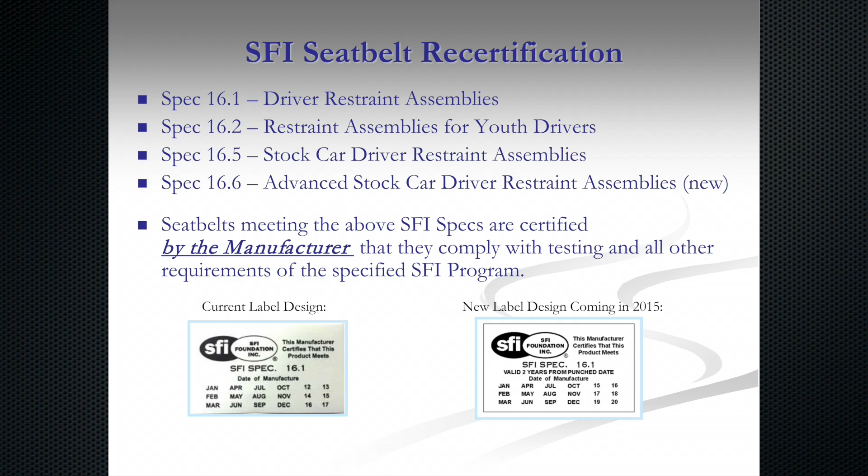Just yesterday we held our biannual committee meeting of the Driver Restraint System Committee to review these series of 4 specs, and starting in 2016, we will have yet another new label that will go on those systems that we think will eliminate a lot of misconception and a lot of confusion. The new label will simply say, this system is valid until, and it will have the date printed right on the label. The manufacturer will attach that label when he manufactures the product, and when it goes out into the field, no matter where it goes or how it's used, on the date that it says on the label, it will require recertification.

And we think that will not only help tech inspectors, but it will help consumers understand; we don't have to figure out, well, what was the date of manufacture, and when is it good to the end of that year or what month. And the bottom line is, the label is going to say exactly when it requires recertification. And we thought that might be a bit of a hard sell to the manufacturers yesterday, and it wasn't. And we were absolutely shocked and surprised that they were unanimously in favor of going to that system to eliminate any confusion and eliminate any possibility of somebody mutilating a label or something that would make it difficult to determine in the tech line exactly when that system needs to be recertified. Sure.

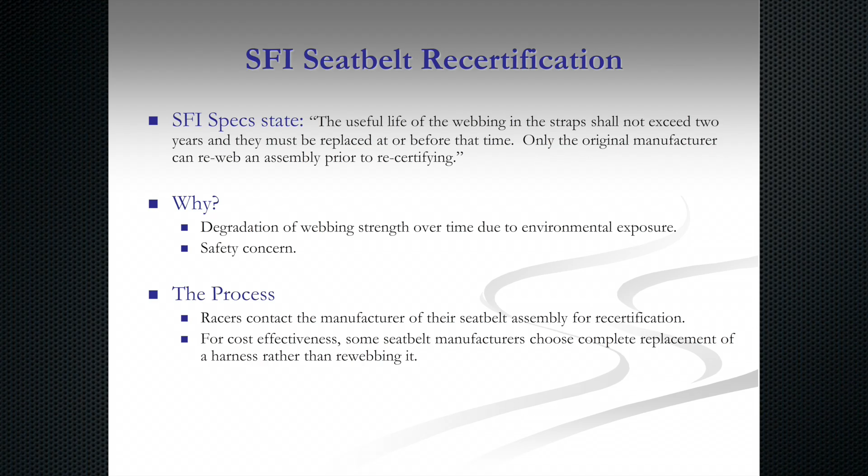And that's up to the manufacturer. Roughly half of the manufacturers are happy to re-web your belts. The other half will take your old belts in exchange, give you a discount on a new set. It costs about $69 to buy a brand new set of 16.1 certified assemblies. It costs about $55 to have it re-webbed and recertified. If you do the math, you can see that buying a new set a lot of times is just a heck of a lot more cost effective because you eliminate shipping costs.

And even though we know the hardware is going to be serviceable for a significant period of time, the webbing isn't. So a lot of racers that maybe have their manufacturer in the same town, they can run it by, pick it up a couple of days later after it's been re-webbed. That might make a lot of sense. But if you don't have that, you got to ship parts around, you're probably better off just to go out and buy a new set or ship your old set back. And most of the manufacturers will give you a significant discount on an exchange of an old set of restraints for a new set of restraints.

Seatbelt certification. What is the 2-year cycle based on? These are two charts that show very clearly the deterioration level of nylon and polyester webbing over a period of time. The first two charts that we have up here are the DuPont light and weather testing, which was in April of 1966, and that was the first time that we know that anybody actually tested the degradation of material over a period of time, and it was done by the actual manufacturer.

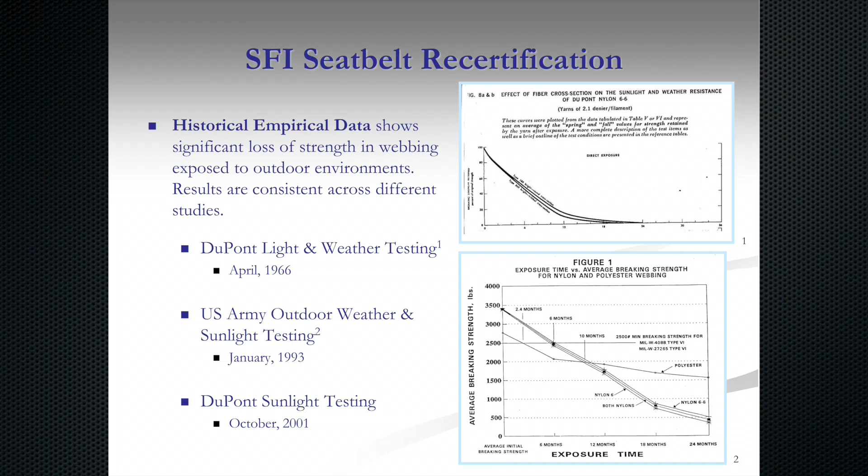DuPont at that time was pretty much the sole manufacturer of nylon webbing used in these systems, and most of their experience came with military applications, and it was actually the military that asked them to provide some empirical data, and this is what they provided them with. By 1993, the U.S. Army decided to do some outdoor weather and sunlight testing of its own to verify the DuPont research, and found that the deterioration factor was actually more significant than it was even in the DuPont testing. And as you can see, literally from the time that the product is produced, it's starting to lose its effectiveness, and it loses more of it over time, especially if it's exposed to UV rays and or moisture or both.

How do we test for UV exposure? My boss at SFI, Arnie Kuhns, licensed engineer, MBA, pretty smart guy, didn't know how he could best measure the deterioration of webbing due to exposure to the elements. So being a scientist himself, he figured out that by stringing up some nylon webbing on the roof of the SFI test lab in Escondido, California, and leaving it there for a year or two, he could probably do some pull tests then and determine exactly what it was.

The only problem with that was any new material that came in for review and testing had to sit on the roof for a minimum of a year, or more like 2 years, before there could be any realistic determination of what the deterioration factor was.

Ultimately, a company came up with a marvelous machine that speeds up the process of exposure scientifically and measurably in a computerized situation, where we can put some material into this exposure testing machine and set all the dials and buttons and switches to whatever criteria we feel is appropriate, and it will impose those forces on that material in a very compressed period of time, and then we can do the extrapolation of the exposure levels versus the pull test that we do on the material afterwards.

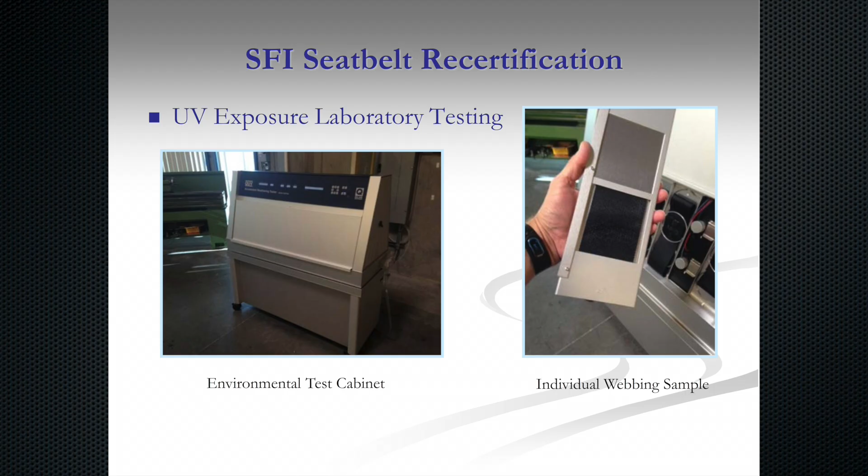And you can not only feel the difference in the material that's been exposed in this machine, you can actually see it. And not every form of nylon is going to discolor the way that particular one did. Some are more, some are less, and it depends on the quality of the dye and the material. But the material changes due to exposure.

Now, this machine exposes not only to UV rays, but also to moisture, and it does both at the same time. So it's producing that worst case scenario that I was talking about before, and it does it in a very scientific and measurable fashion. Seatbelt recertification based on scientific data.

Now, some of the numbers that you see here aren't going to make a lot of sense because of the way the tests are conducted, but essentially the spec requires that the entire system sustain 6,300 pounds of force on the body block in order to pass the test. That means that each piece of that material, including the 2-inch anti-submarine strap, has to collectively withstand 6,300 pounds of pressure. You can see very quickly that new nylon, which we call the control nylon, 10,000 pounds of pressure, well above the minimum. Poly, right in the same range.

Once the material has been subjected to the UV rays and the moisture and the retest is done, those numbers drop significantly to where nylon, on the average, falls below the 6,300 pound minimum level. The whole idea of 16.1 is to make sure that the restraint that's purchased new meets or exceeds the spec, but that it also meets that requirement at the end of its useful life, or the 2 years.

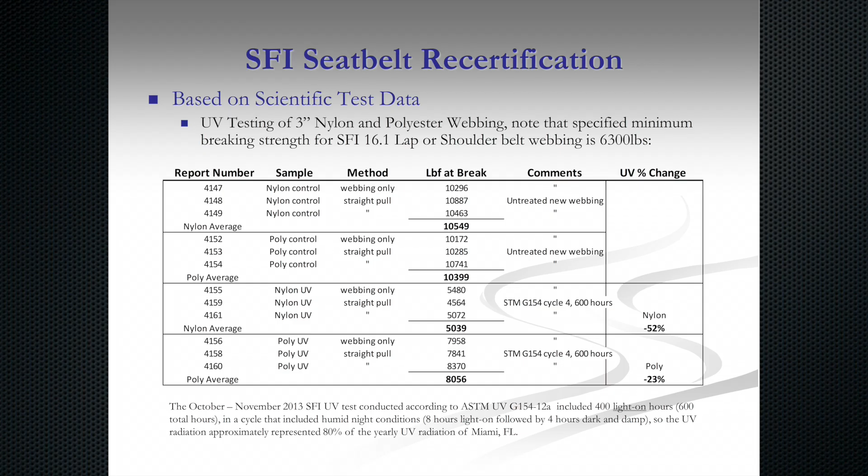And you can see that it's very close in the case of nylon to not even coming up to that standard. Again, this is worst case scenario exposure, so under average conditions, after 2 years, all 16.1 systems will meet that 6,300 pound requirement.

The next one is simply the difference between 3-inch webbing and 2-inch webbing. And a lot of systems now that you're seeing in the tech lines are what we call hybrids. Some sanctioning bodies, and I think maybe the NHRA, still require minimum 3-inch webbing. The spec doesn't care, really. There is no requirement in the SFI 16.1 or the 16 series specs for 3-inch or any other width. It's strictly the strength requirement.

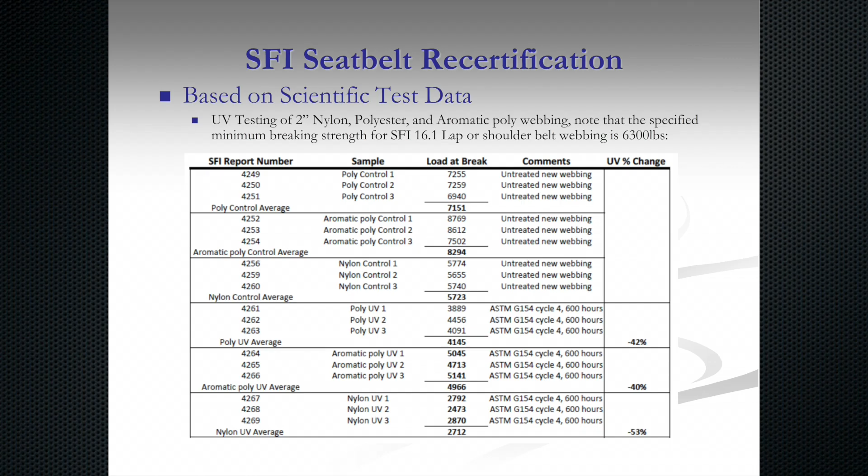And with some of the improved materials, we find that the 2-inch belts meet or exceed the same pull requirements as 3-inch material, simply because it's heavier, it's thicker, and it meets. And biomechanically, a 2-inch system in many cases is actually more effective on the human body than a 3-inch system.

Another thing that came into play was the hybrid system, which is where you have a head and neck restraint, and the restraint is not designed to accommodate a 3-inch shoulder strap, but it is designed to accept a 2-inch strap. And you'll see systems come through tech now where the shoulder harnesses are 2-inch, or at least in the area where they pass over the head and neck restraint device, but the lap belt will still be a 3-inch belt, and maybe even the lower part of the shoulder harness will as well.

But we do have systems that are entirely 2-inch, lap, shoulder harness, anti-submarine, that readily pass 16.1, and many sanctioning organizations accept them readily. And biomechanical engineers like Dr. John Melvin will tell you that the body actually likes a 2-inch system in some cases, or in a lot of cases, better than a 3-inch system.

It used to be you saw all of the same stuff come through the tech line. It was all 3-inch, it was all 16.1. It's not that way anymore, and it's important for you to understand that what you're looking at is going to be a different kind of system than you may have seen over the past few years.

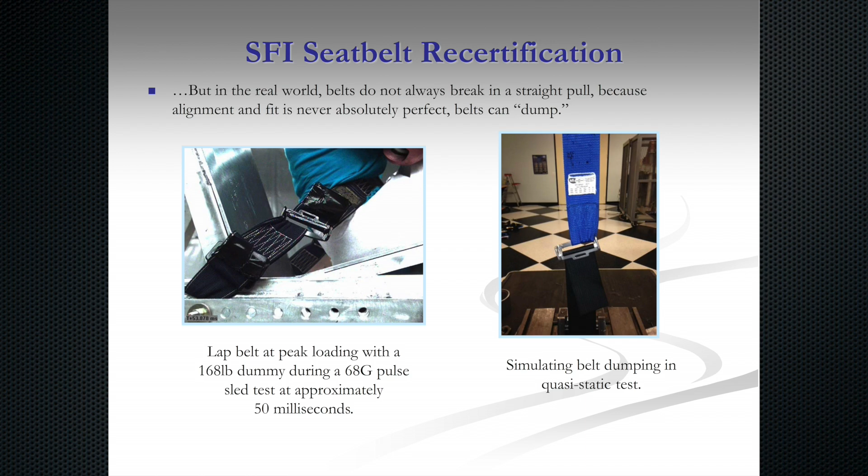But you also need to look at the installation, and if you see a lot of misalignment between parts of the system, you might want to suggest to the racer that they get together with the manufacturer or the chassis builder or whoever and take a look at the way things are done, and make sure that when there's an impact, whether it be frontal, top, side, or whatever, that all of those sections of the system remain as well aligned as possible. So those are some things that you want to look for. And again, we have the numbers that show what kind of deterioration in performance that we get in the dumping situation.

Now, the testing we do for certification to the 16 series specs is done on what we call a body block. It's a wooden block that mimics the human form, and the restraint system is draped over the body block, attached to hydraulic rams that are calculated to apply a certain amount of pressure to the entire system at one time. And it pulls on all 5 or 6 or 7 of the elements of the system at the same time, pulls it to the required 6,300 pounds and stops. We do not test these systems to destruction.

So people ask me all the time because they know I'm involved with SFI, well, what's the best one? I want the best one, the strongest one that money will buy. We don't know. We really don't know because we only test to the spec. We don't test to destruction. We want to just make sure that the system that's labeled and certified meets the minimum standard, because we know over years and years of experience in all kinds of racing applications that the standards required by the spec are capable of keeping the driver in the car where he belongs. And that's all we're trying to accomplish.

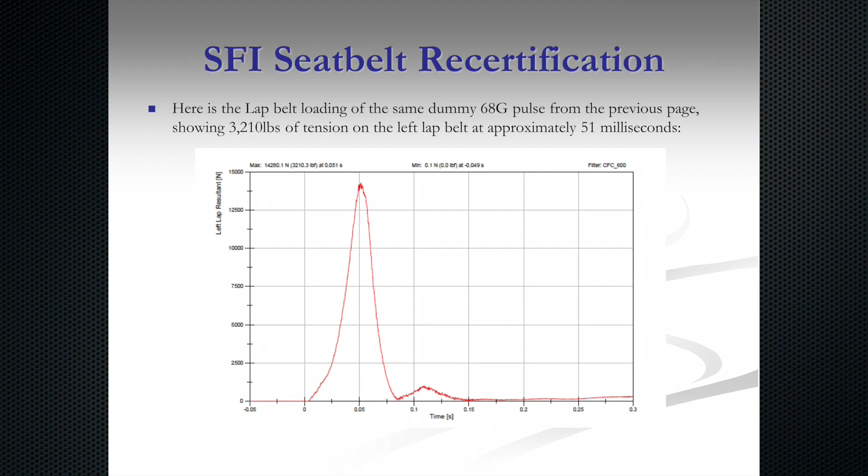And when you see numbers like 14,000, you think, oh my God, that's way above the test spec. Well, those are newtons, which is an engineering term. That's really 3,200 pounds of pressure that's exerted on that driver restraint system in that frontal impact. And it absolutely correlates directly to the numbers that we see on the body block. So it helps us to verify that the numbers that we're dealing with are correct and verifiable.

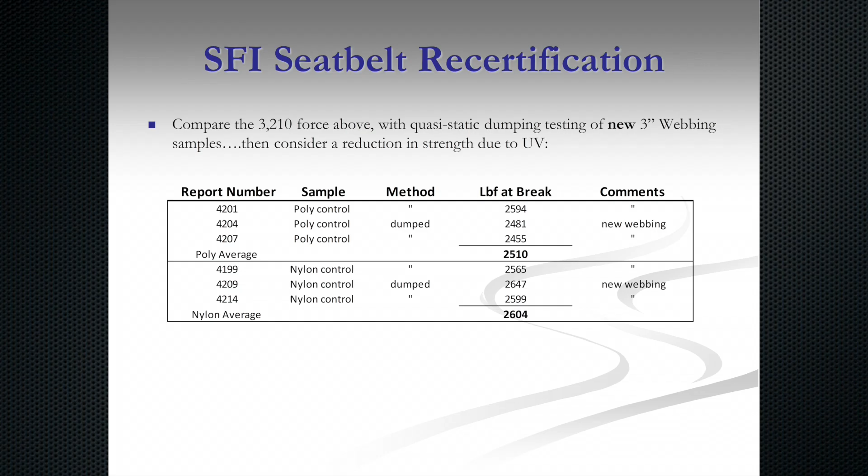The next recertification slide here talks about 3,200 pounds of force, which is similar to what we had on the sled test, and it shows the deterioration of performance when dumping occurs. And this relates right back to the installation issue that I talked about before. If the system is not installed correctly and you experience dumping, those numbers drop down into the 2,500 pound range, 2,600 pound range, which is only about a third of the required strength of the system according to the spec. So it just re-emphasizes the importance of proper installation.

Seatbelt recertification, other considerations. Certifications are not valid beyond the expiration date set by the standard. Allowing use past expiration is a liability risk. Let me talk real quickly about liability risks. I spent 9 years at the NHRA as Vice President of Safety, Insurance, and Legal.

The least number of lawsuits that NHRA defended during those 9 years that I held that position, the least number was 21. NHRA is a huge litigation target because of what we do. Now, not all of those were drivers involved in crashes. They were drunks falling out of the grandstands, people tripping in the parking lot. I mean, there were, but suffice to say that we live in a very litigious society.

SFI has developed 2 programs that are designed to protect the sanctioning body and the individual tech inspectors from liability exposure. One of them is the minimum standards. If you make sure that all of the products on the car that are required to meet minimum standards as required by the rule book, as an inspector, you are virtually liability free. The sanctioning body is also liability free.

But in the worst case scenario, somebody crashes. There's a post-incident investigation done. The family hires an attorney. The attorney hires an expert to do his own examination. First thing he determines, well, the driver restraint system was out of the certification cycle. It was illegal for use. That constitutes improper inspection, which results in something called strict liability.

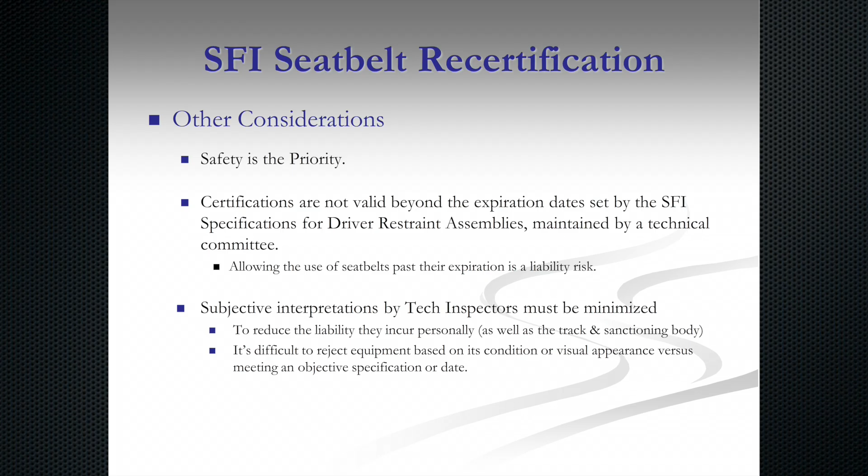Subjective interpretations by tech inspectors must be minimized to reduce the liability they incur personally as well as track and sanctioning body. It's difficult to reject equipment based on its condition or visual appearance versus meeting an objective specification or date. That means that no tech inspector should be charged with the responsibility of simply looking at a driver restraint system and saying, yeah, it looks pretty good to me. Make sure it's in the recertification cycle.

What it doesn't mean is, if you see that there's a cut or a tear or a burn in that system, or that the installation is incorrect, or the hardware involved in the installation is incorrect, that you shouldn't reject the system and require it to be brought up to spec, because that's part of your job as well. Simply seeing the tag isn't enough. You need to do the entire job, which is to make sure that every aspect of the installation and the product is correct. Other considerations.

Webbing strength deterioration can be invisible, and this is what I talked to a little bit before in our UV box. These are 3 different examples of webbing that we have tested in our environmental box, or subjected to the environmental situation. They all are virtually identical in performance, but completely different in appearance, and it all has to do with the quality of the dye. So you cannot look at a system and, because it's jet black, assume that it's brand new or it's serviceable. Doesn't mean anything other than the fact that it's probably a little bit prettier than the one that turned gray.

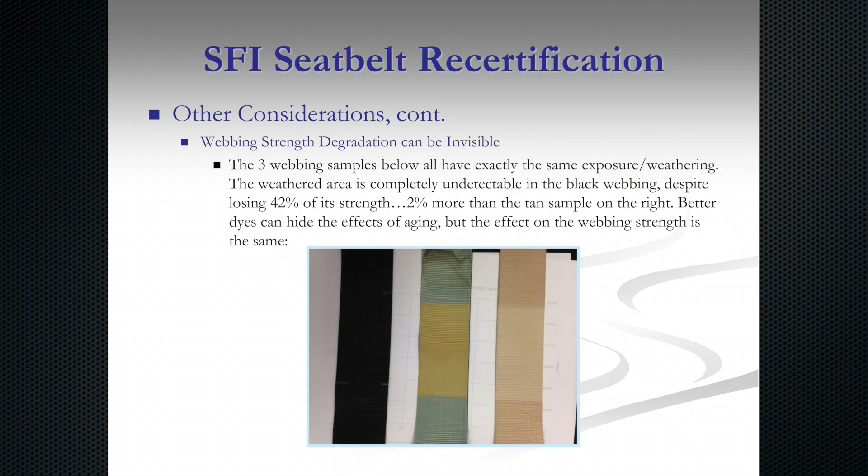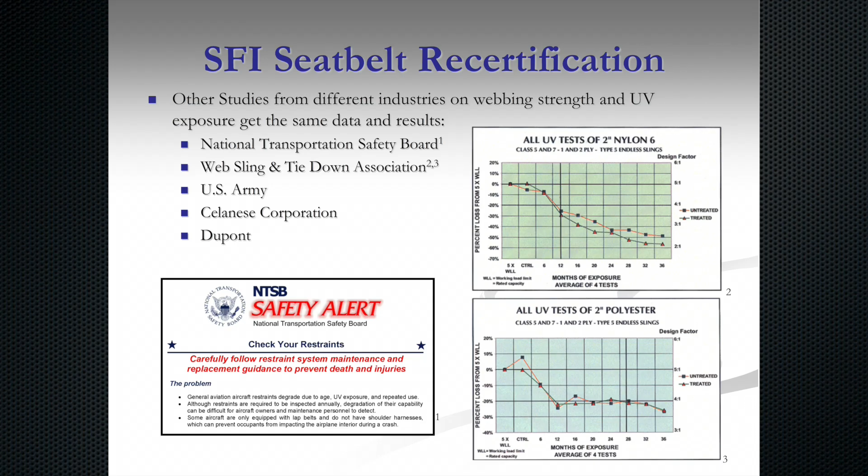Other sources and studies on webbing strength and UV exposure: National Transportation Safety Board, Web Sling and Tie Down Association, U.S. Army, Celanese Corporation, DuPont. All of these are tests that have been done by various governmental agencies and manufacturers and military organizations, and we include them because they absolutely mimic everything that we've seen as far back as the DuPont 1966 tests.

It's the product of nylon webbing is what it is. It hasn't changed much in the last 50 or 60 years. It's not likely to change much. We get a question a lot of times about in our testing, what's better, nylon or polyester? They have different qualities. Some nylon performs better in some ways, polyester in other ways. Nylon slips less in an adjuster than polyester, but polyester degrades slower than nylon.

They both, after a 2-year period, end up at about the same strength level. It's just that the nylon drops off in strength faster than polyester, and that's why a lot of racers have been convinced by manufacturers that polyester is actually a better option. And sometimes it is. Sometimes it's not.

The important thing is they're both certified to the same level of testing, same minimum requirements, and it's really up to the consumer, the racer, to determine what's best for his application. As long as it's in the certification period and it's undamaged, it shouldn't make any difference to you one way or the other.